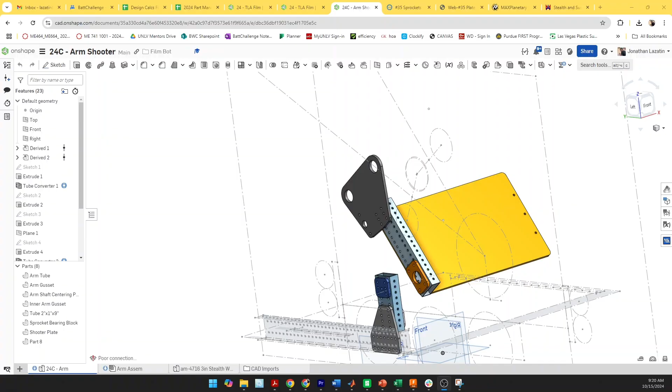So now we're gonna go through the process of setting things up in Fusion 360 to CAM the part. So CAM is computer aided manufacturing. This is how we develop the tool paths needed for the part to be cut out on the CNC router.

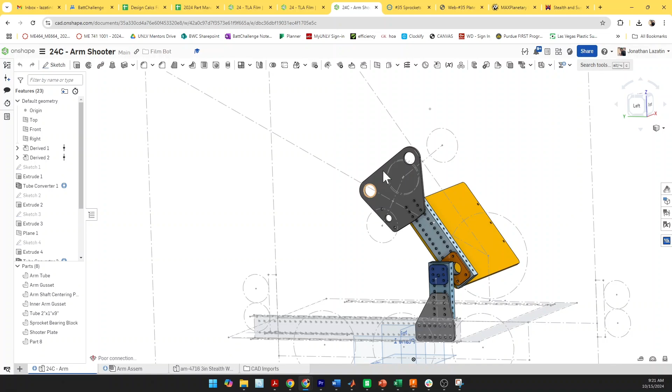So the first thing I'm gonna do in the part management system, let's go ahead and do this from the top where we put things into the part management system. So let's go ahead and do the shooter plate. This is going to be the first item in C. Let's change C to arm shooter, and then D is actually going to be intake. So changing our part management system based on how we're designing right now.

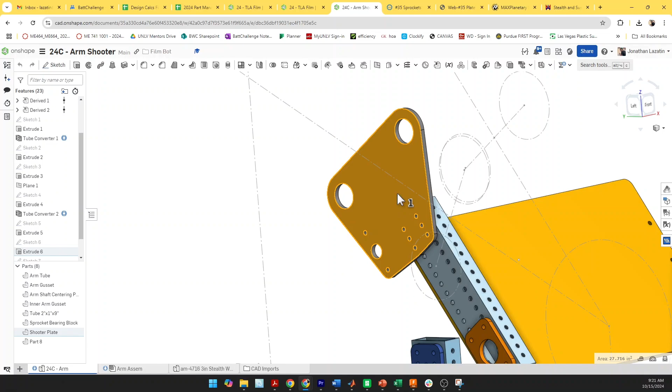Arm shooter, first part number, Control Shift V there. Go back to my arm. We're gonna make this a 1/4 inch. Let's do this in polycarb, a 1/4 inch polycarbonate plate. So we're gonna need 2 of those. Remember, they're flipped. One has the motor on the top side, one has the motor on the bottom side.

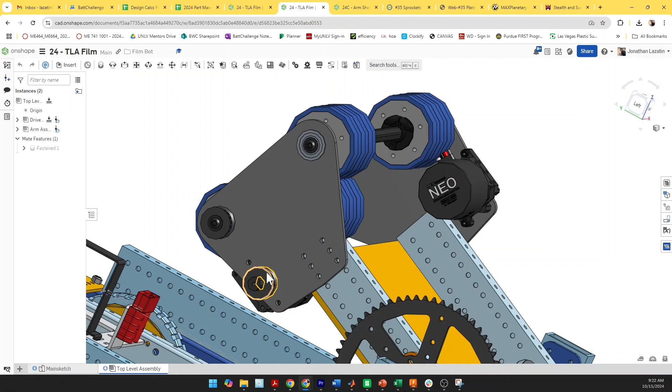I did this so that we could have one plate that could do both sides, but not necessarily wasting material to where we have like a second mounting hole on the other side of the shooter plate. That's another way to do it, but we decided to do just one side now and just flip it on the other side, which is fine.

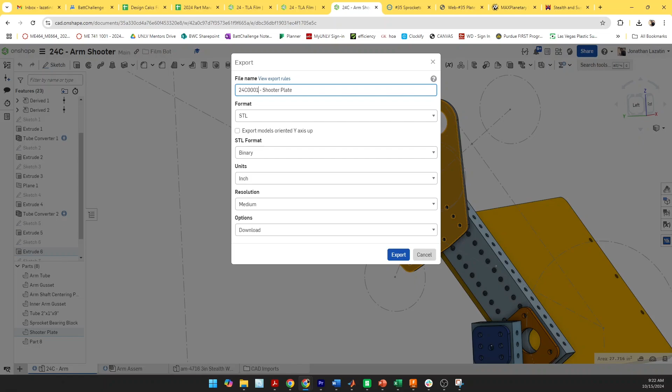So then let's see, what else do I need to do on the part management system? This is shooter plate, not obsolete. It is going to need a DWG. It's going to have the same part number for the file name, and this is a 1/4 polycarb. We need 2 of them, and they're going to be on the CNC router. Okay, and then from here, I'm going to need to export this as a DWG. This is going to be shooter plate, bringing in the part number.

Okay, so in export, what do we want, a DWG? I did the wrong thing here. There's 2 types of export options. There's export and there's export DXF DWG. We want this one right here. That's going to allow us to get that 2D shape of the front face. Same thing, name, DWG, download, good to go.

Now I'm going to go to my Google Drive. Now let's go to the UNLV Mentor Shared Drive, Fall Course, Robot Design, Film Material. And then that file that we just exported is going to go into the part files section. That way, if I design it, but somebody else is on the fabrication sub team, they could download it from Google Drive to do the fabrication. So if I'm on the design team, I'm just exporting all these files, and then the fabrication team is downloading them and using them to do whatever process they need to do afterwards.

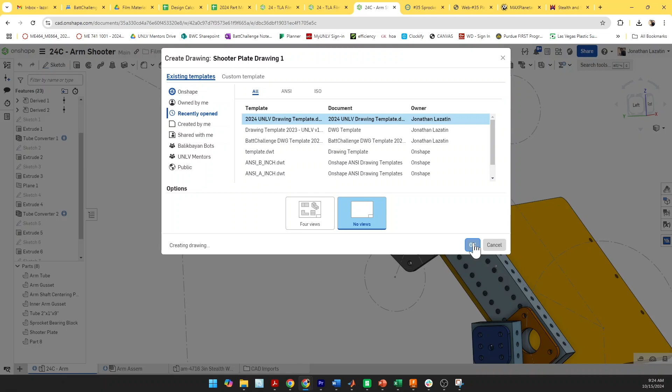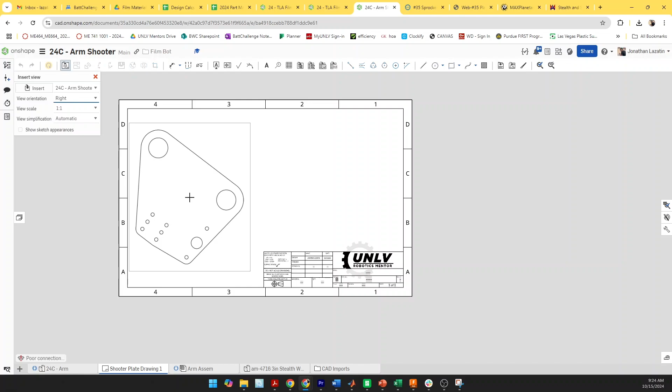We also need a drawing for this part. So right-click the same part, create a drawing of the shooter plate. Use the 24 UNLV drawing template. Let's see if this is small enough to fit 1:1 on a page. I don't think it is. So let's see what it looks like when it's 1:1, and let's do the right face. Oh, it might be. All right. So boom. Cool. So it is small enough to fit on one page.

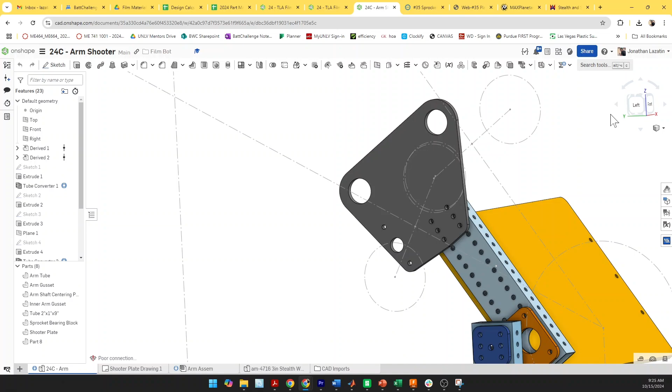Let me show you something real quick that also helped. This thing was designed at an odd angle, so it's bringing in the view from that angle. So if I go to that arm part studio, it is giving me the view directly from the side view of that part studio. So if I go on the right side, it's giving me the part at this angle. If I take this front face and I press N for normal, I'll look straight down the side of the plate, kind of like if I was looking straight down the shooter subsystem, right?

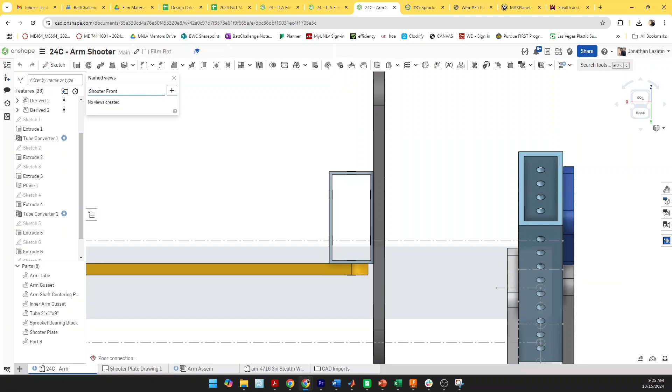If I click this cube and then I go to named views, I'm going to call it shooter front, and I'm going to add this view. Okay. Now if I go to my drawing again, I can double click this guy. It'll open up a menu over here, and in my view orientation, I think I need to drop in a new one. So let me go ahead and remove these guys.

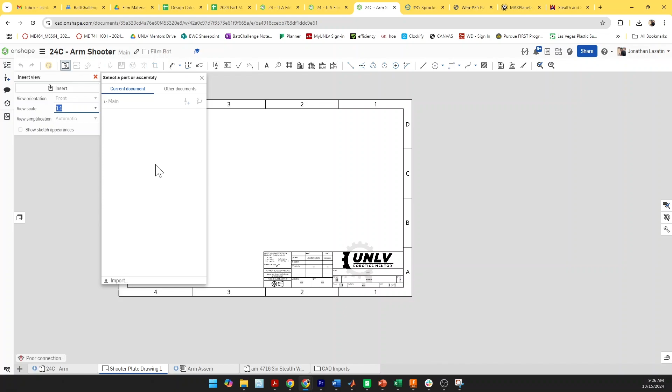Insert view. I want to insert my shooter plate. Current document, shooter plate, 1:1, and then my view orientation, now it's uploaded shooter front. And that should give me a little bit smaller of a projection of that view.

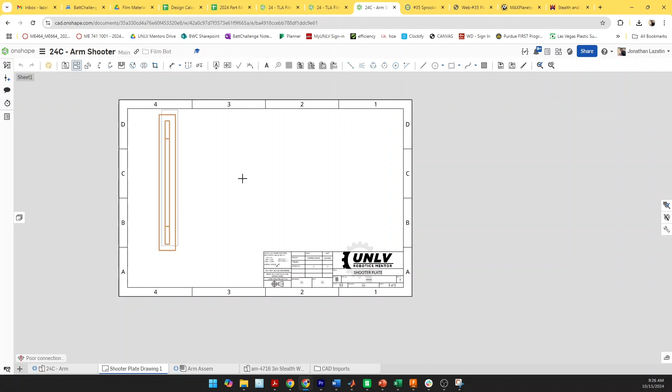There we go. So now it fits better on the paper. So what would the fabrication team want to know? Well, they'd want to know how big of a piece they need. So I'm going to do top and bottom. Boom. I'm going to do thickness so they know what material to grab.

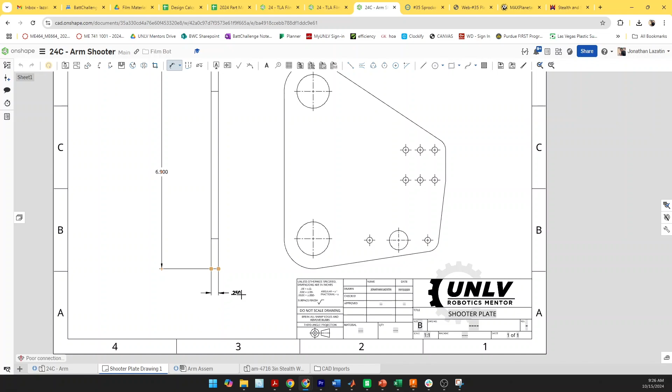And then I'm going to press M, which is a dimension tool in drawings that's maximum or minimum. So I'm going to go from the front. Actually, no, the maximum is at some straight lines here. Usually if there's a curved feature like this and you want to dimension the highest points here, you'd use maximum and minimum. But since the front and back face have these straight lines, I should be okay just to use the regular dimension tool.

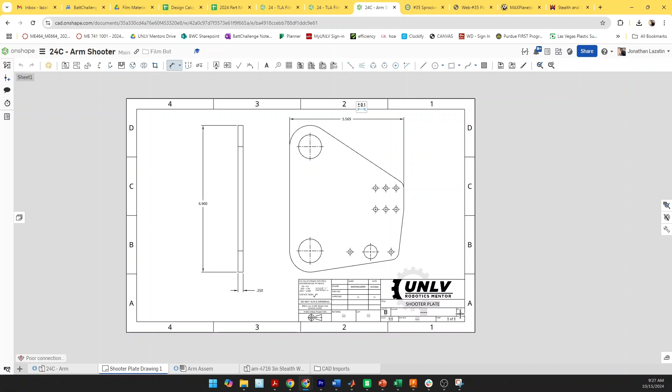Okay, so we need to have a part that at least has an area that's like 7 by 6 inches of cutting surface, and then a 1/4 inch polycarb plate. The thing that I forgot to do was to do the properties. You see how this is now empty? That's okay. I can go here, shooter plate, go to my properties.

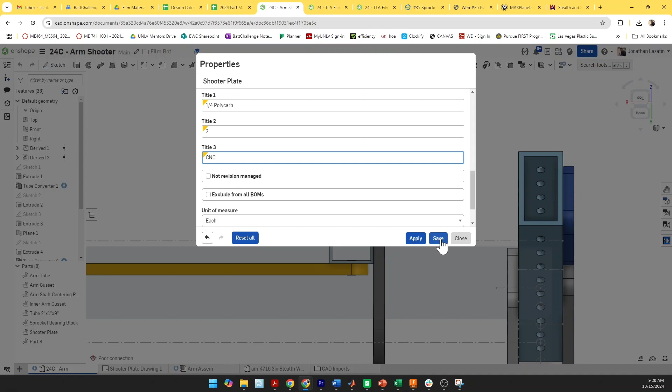I can open up my part management system, grab part number, and I'm looking for arm part number. This is revision 1. Title 1 is material, so that's 1/4 polycarb. 2 is quantity, so that's 2, and then 3 is process, so that's CNC. I go ahead and save that. I go back to my drawing, and now it shows.

Now that circle in the upper left is yellow, meaning that there's something to update. So I click that, and now if you watch the part data down here, it fills in V1, CNC process, 1/4 inch polycarb, 2. So now this is ready to go for the fab team, so they know they have to make 2 of these.

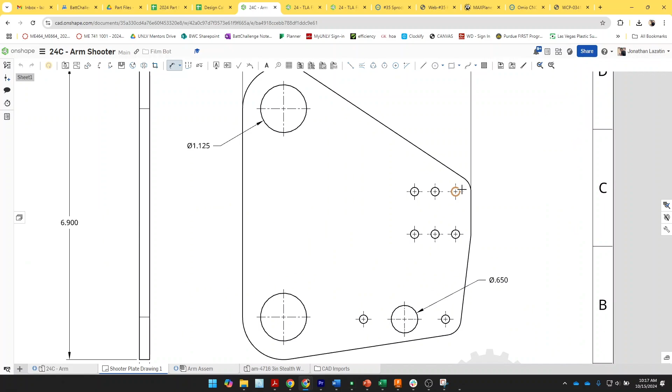I forgot to mention this previously, so I'm going to splice it in here. Other things that the fabrication team might want to know are things like this hole size. They can confirm that's a bearing hole size by looking at that. This hole size, so that'd be a shaft pass through, and then these hole sizes here, just to confirm that we're using the 201, which would be the 5mm drill bit that we would use to do those.

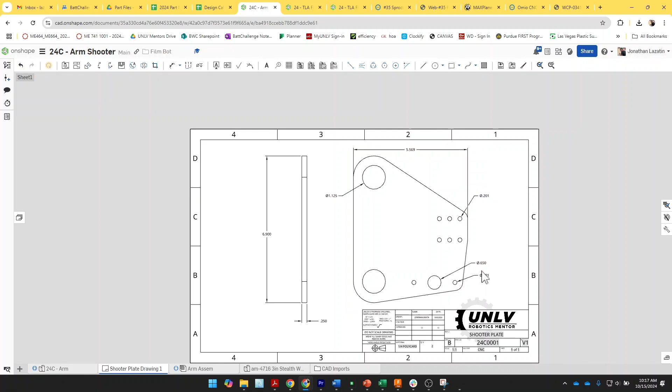So it'd be important to do the interior dimensions in here as well, just so the fab team knows what tools they need to grab. And typically the 5mm drill bit, or the milling bit, is what we use for all of this, but for them to confirm, they can look at this information here.

Right click, export. We are going to want the part number, and then part number dash part name. It's currently being exported. This is going to be in PDF drawings. Once this is downloaded, it's going to drop down in here.

Now, the last thing I need to do to finish up this part management section is to link the files here. So that's going to go shooter, share, copy. This is the PDF drawing, insert link, paste it in there. Part file, DWG. This is the shooter plate, share, copy link, and then paste it in here.

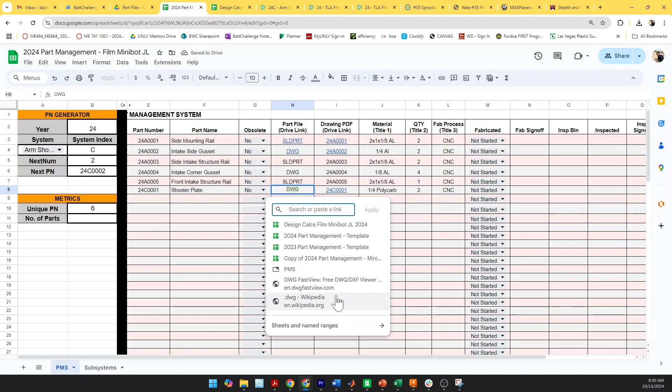Boom. Cool. So now I have all of the stuff that the fabrication team needs to do this. So as a design team member, I did my job of putting in all the information for the fab team. Now from the fab team, I would go in and download these files. I'd look at the drawing, see how many I need. I'd look at the part, see the area of polycarb that I need to make this. I would download the DWG.

Once I download the DWG, I would open up Fusion. All right. So now that I have my Fusion open, I'm going to upload, select files, and then I'm going to go to the shooter plate DWG that I just created, and then I'm going to upload that. And then once that's uploaded, you'll see it populate here on the top left.

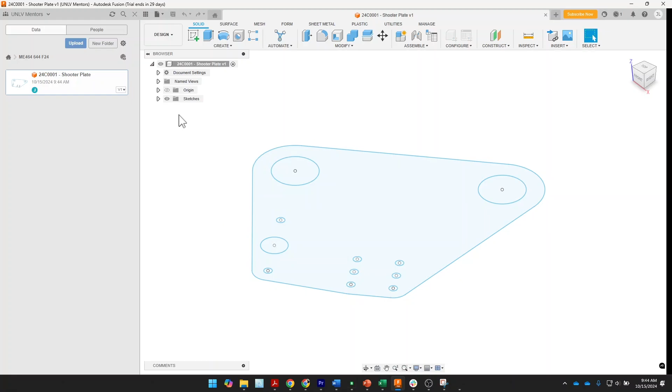All right, so now the file is uploaded. I can open it up on Fusion. It'll load like this. It's just the 2D shape, and then from here, I'm going to move from the Design tab to the Manufacture tab. So the first thing when I'm in the Manufacture tab, I'm going to set up my workspace. So I'm going to go and create a new setup.

I'm going to first change the stock to be a fixed size box, and I'm going to change the height to 0.25 inches. I'm using a 1/4 inch piece of polycarb. Here you actually take calipers and measure, so it's typically a little bit less than 0.25. Usually it's like 0.235 something. But that would be the measurement that you get from the calipers from actually measuring the stock you're using.

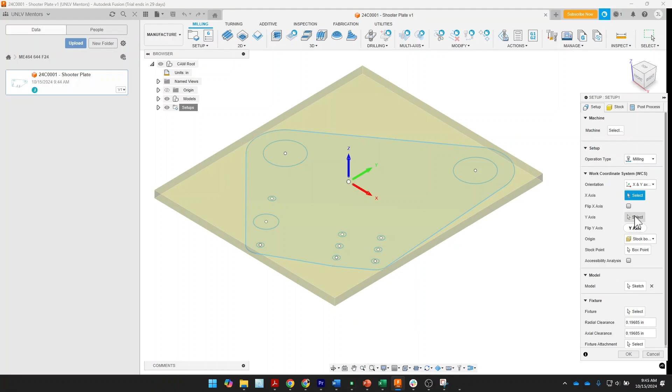Next, in the setup section, let's change the coordinate system so that it's a little bit friendlier. I want the x-axis to be along the face of the part, kind of similar to what we do with the drawing. I'm going to select my x and y axes. My x-axis, I want to be this guy here. We know this line is perpendicular to the shooter mounting tube, so I'm going to choose that as my x-axis. And as you can see, it very heavily reduces the amount of material needed to cut this part.

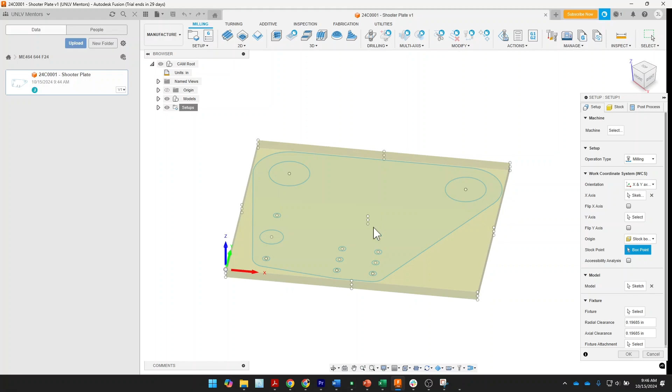And so here, I'm going to also change the stock point to be the bottom left corner, because that's going to allow me, when I zero it on the machine, to do a quick XY sweep to make sure that the stock I'm using actually fits the part I'm trying to make. So that's good. I've changed my thickness. I've changed my coordinate system to reduce area of the part on the material, and then I've changed my box coordinate to be bottom left, and also the top surface is what you want here. You want the bottom left corner top surface of your material.

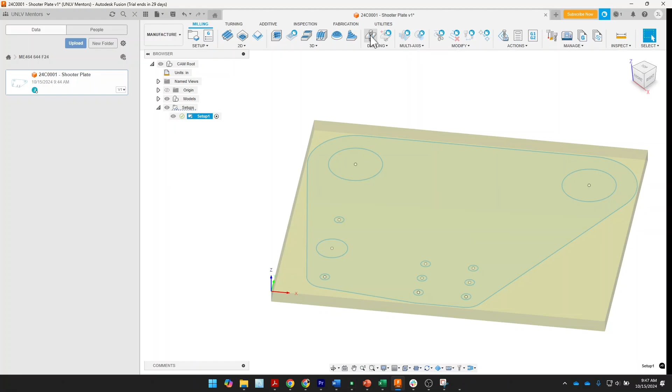So my setup's done. Next, I'm going to start cutting out these internal features. General workflow is internal features first, external contours last. Holes, just straight drill holes, which are all the 201 holes, do first. And then second is going to be the large holes. And then final sweep is going to be the exterior. So first thing I'm going to do a drilling operation, select my tool.

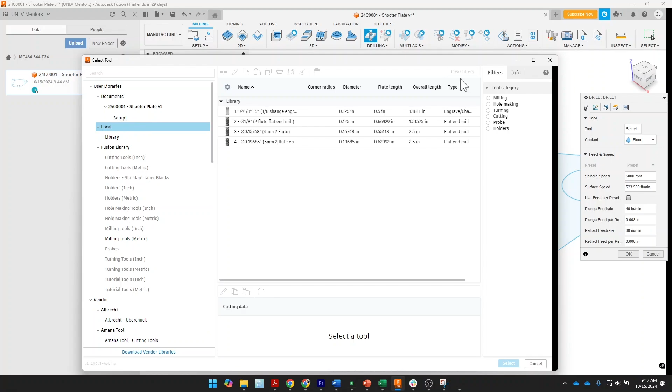The tool that I have is a 5mm single flute bit, which I think is in the shop computer, so it's not here. So I'm actually going to add this tool. Going to library, add tool. It's a flat end mill, and then it says 5mm single flute. Vendor is going to be WCP. Cutter, it's going to be flat end mill, millimeters. It's carbide. 1 flute. Diameter is 5mm.

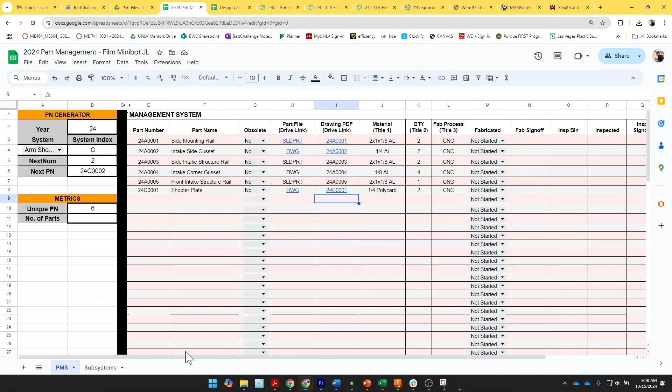I'm going to put in some numbers in here just because the actual numbers are in the shop and I'm doing this at home. But essentially this is already created. So let's get this all sorted out first. I'm just going to put in some numbers that are relatively okay. Overall length must be greater than length below holder. So let's say that there is 15 below the holder. Shoulder length is 13. Cutter is 12. Okay. Cool.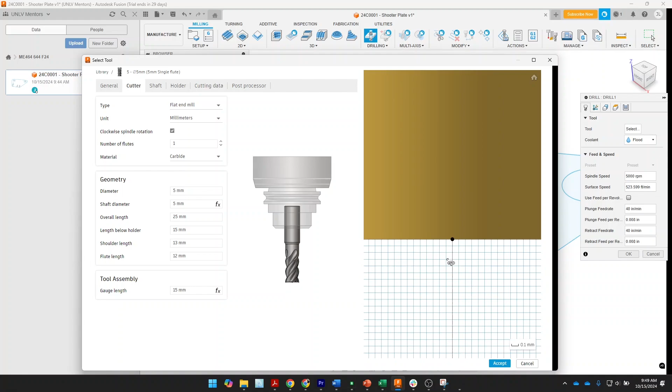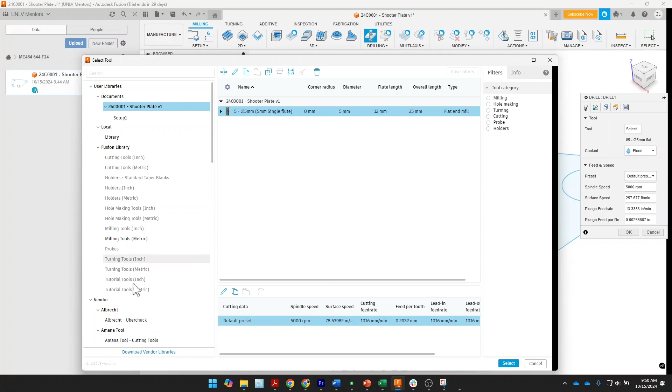So this is my part. Single flute, carbide, flat end mill, 5 millimeters in diameter, 12 millimeter cut length, and the rest are kind of guessed based on having seen the bit, but you'll have the real numbers in shop. So I'm going to do this 5 millimeter single flute as my cutting tool. Oh, all the presets for that tool are also included in there as well. So let me edit those. The single flute, I'm going to go into edit that part. So library, 5 millimeter single flute. Let's go ahead and edit the data.

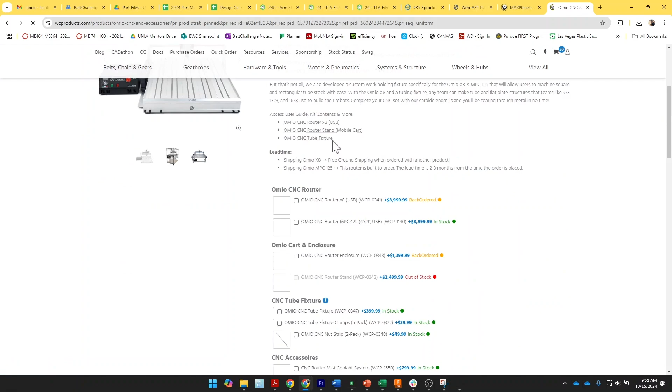And let's confirm that real quick. So back, we're going to go to the Omio. They have a manual on the website. And so if we're looking, here we go. So, okay, so it's actually 24000, so I'm going to change that. Feed: something between 60 and 120 is typically good for aluminum. These numbers can be doubled or tripled for softer material like polycarb, like the one we're doing.

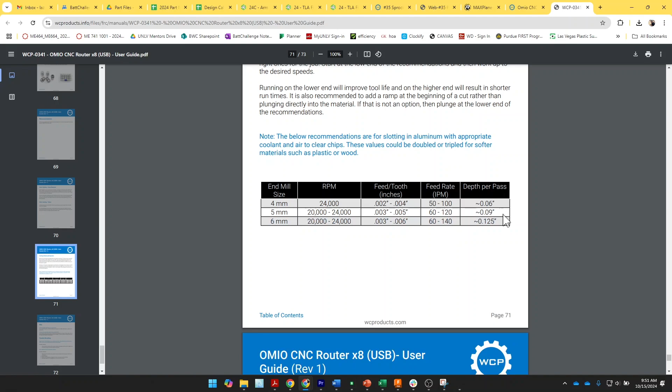And then depth of pass. Okay, cool. So, all right, so I like my numbers. This is going to change to 24000. And then 100 inch per minute here is fine. And then I think we're good here. So now when I look at my tool path information here, my drilling path, my RPM is changed, my speed is changed.

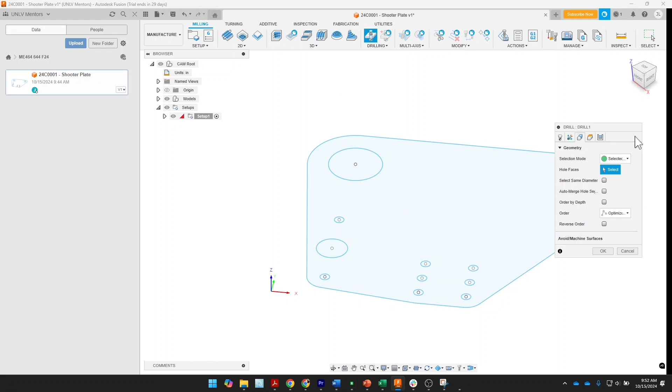Next, I'm going to select the geometry that I want to drill out, and I'm going to select the points. So this is going to allow me to just select the centers of each of these holes. And these are all the holes that are that 0.201 diameter that we did in the design. For the drill depth, I'm going to do this bottom height. I'm going to change this to lowest selected, stock bottom, and then I'm going to make an offset of 0.0125.

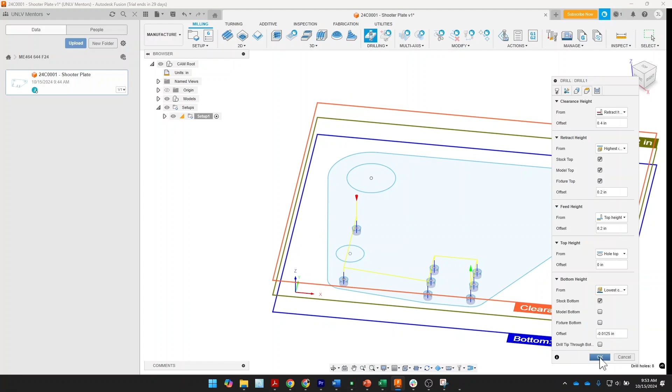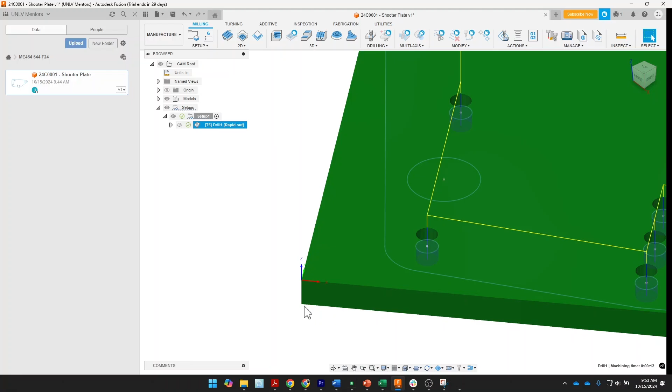And so what this is going to do is it's going to tell the drill bit to go from the top of this origin here. It's going to go the depth of the stock, until the stock bottom, and then it's going to go a little bit past it by 0.0125, and this is going to allow us to go through the part barely into the spoil board underneath, but it'll make it so that we definitely go past the part if we've zeroed on top of the surface correctly. So that's drilling the holes.

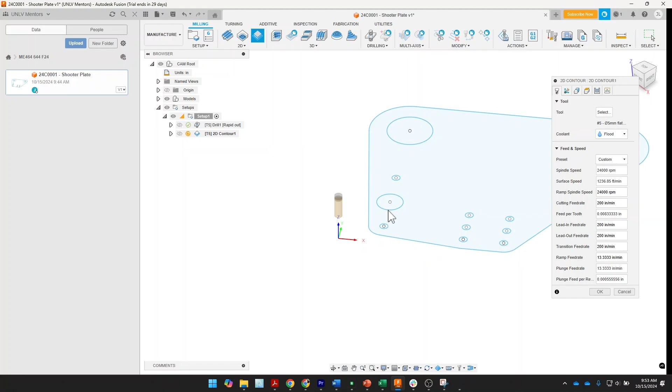Next operation, we're going to do a 2D contour, and then we're going to select the same tool, 5 millimeter single flute. Okie dokie. And then we're going to change the cutting feed rate to 200 because this is polycarb. It's much softer than aluminum, so we can go a bit faster. I'm going to do all of the geometry, all of the larger holes now.

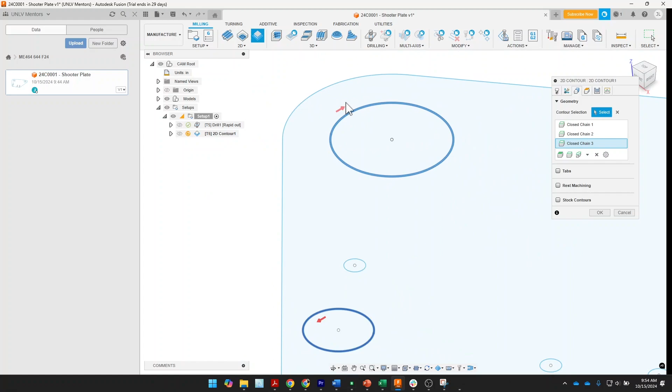Now, when you do 2D contour, something that you have to consider is the location of these red arrows. That'll tell you what side of the geometry the drill bit will be in. So this tells me that the drill bit will be doing its path inside of the circle, which is what we want. We don't want it to be on the outside of the circle like this, because then we'll be cutting out this additional material on the outside. So interior contours, red arrows are inside the part.

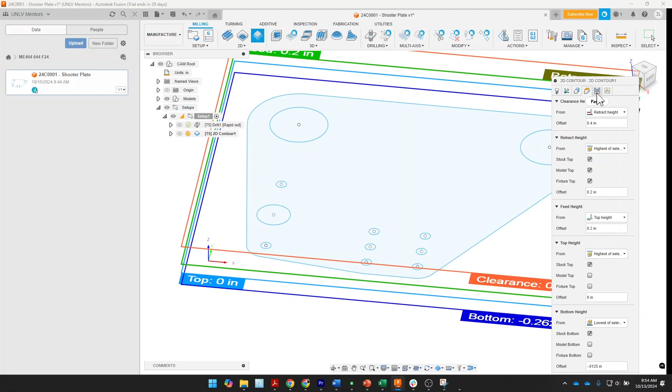Heights are going to be the exact same thing. I'm going to go to bottom height, lowest point selected, stock bottom, -0.0125. And then for these 2D contours, because the drill bit is going to be moving as it's cutting, we also have to tell it the depth of the cut. So I'm going to go to this multiple depth section here. I'm going to change this to 0.1. For polycarb, 0.1 is what I typically use.

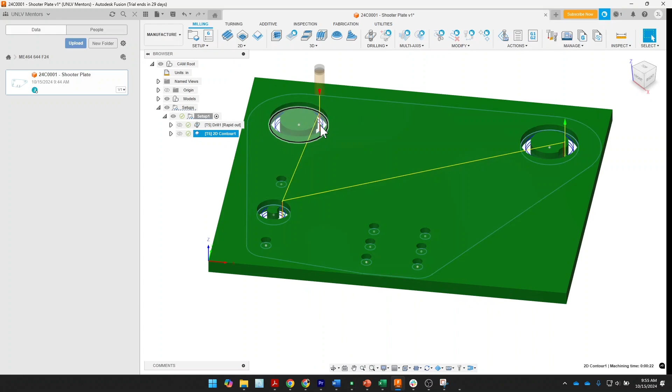If I'm doing aluminum, I would pick something like 0.05 or 0.04 or 0.06 if it's a really small part and it's not going to get too hot. But 0.1 for polycarb works fine here. And then I will select OK. And now it should create my tool paths. You'll see that these blue circles indicate the path that the drill bit's going to go on.

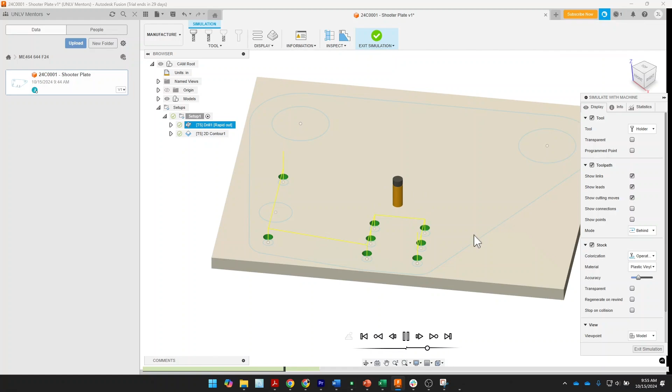So I can actually simulate what it's going to look like if I select both of these tool paths. I press Control to select both of them. I have the simulate with machine button here. I'm going to play that. And this is the speed slider, so you could change the speed based on how fast you want to view the simulation. But you can see the drill bit actually moving in each of these contours that it's making. So those will be the interior passes.

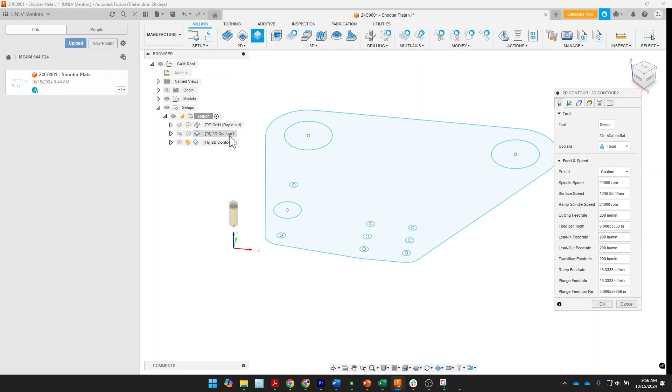That looks fine. And then I'm going to do one final 2D contour, and this is going to be on the outside. Because I did a contour before with the right tool settings, it'll pull in the tool settings from the previous contour, which is fine. It has the 200 inch per minute feed there, which is good.

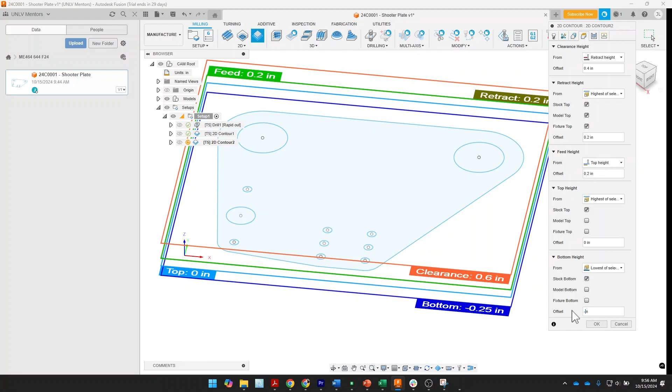Geometry, I'm going to do exterior contour. Here I do want the drill bit to go on the exterior contour because this is cutting out the part. We want everything inside of this shape to be kept, and so the drill bit is going around the outside of this part. Next, heights, same thing: bottom height, lowest selected, stock bottom, change this to -0.0125. Passes, multiple depths, change this to 0.1 because it's polycarb and it's soft, and then OK.

Cool. So now I can see actually the whole tool path. I'm going to simulate, and then it's going to drill all the holes. It's going to do the contours. So one thing to note, because it's 1/4 inch thick here and we're doing 0.1 inch drill depths, it's going to do about 3 passes to get through the entire material. So it's going to go down 0.1, drill out, 0.1 again, drill out. So that's 0.2 now. And then it's going to go the final 0.05 plus the -0.0125 to get down to the rest of the material.

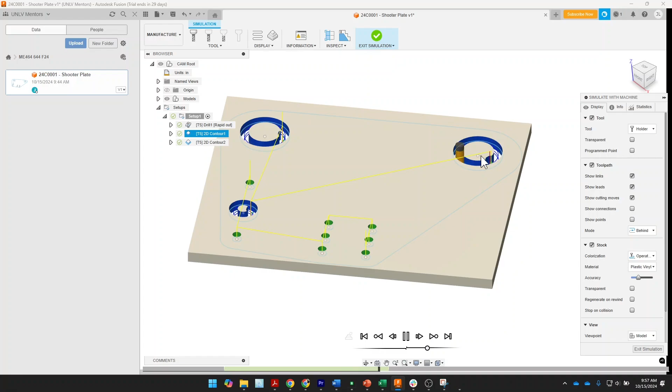So one of the things I'm looking at when I'm watching the simulation is that it's doing the amount of tool paths that I expect it to based on the selection for drill depth. So I'm also confirming here that it's drilling on the outside contour, and it did 3 passes, so that looks good. And now I'm going to export this in two

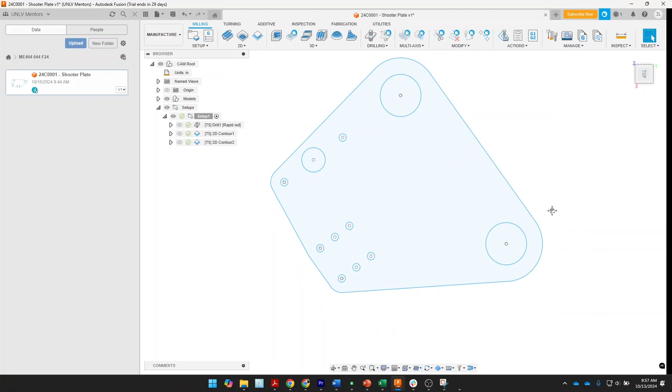different files. So first, I'm going to take both of the inside contours, and then I am going to post-process. It's going to open up this new window. Mach3 is the post-processor that we use for the Omio. So make sure you select Mach3 here. File name, I just put the part name, and then I put whether it's the interior holes or the exterior contours, because those are going to happen in 2 different tool paths.

So this is shooter plate holes, and then let's put this in a different folder. So I'm going to go desktop. I'm going to create a new folder called CNC files. Already contains, oh, I already have one. So let's go ahead and rename it. Fall 24 CNC files. Cool. So select this folder, and then this now should download directly to that folder.

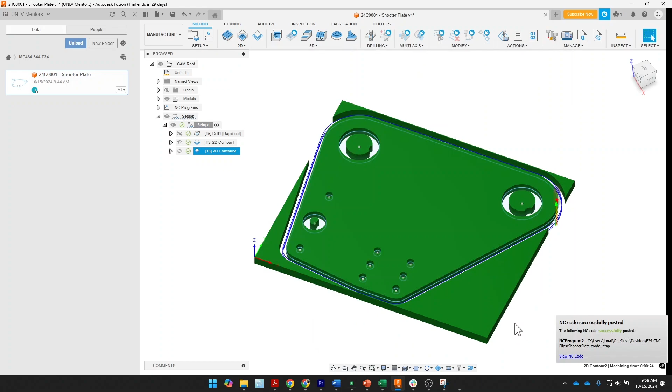Going to do the same thing with this exterior contour toolpath. So I'm selecting the toolpaths that are being exported. Same thing, post-process Mach3. Now this is shooter plate contour, going to the same Fall 24 CNC files. And then I'm going to go to that folder, Fall 24 CNC files.

And then the next couple things I'm going to do before I actually put it on the Omio is I'm going to remove a couple of lines from the G code, because these lines are making the drill bit go into the material before actually cutting, which I want to prevent. There is probably a better way to do this by selecting some options, but this is what I have working so far. I'm going to open up the shooter plate G code. Let me close these other files. I'm going to delete at the top of my file.

I'm going to look for the thing that says G28 G91 Z0. I'm going to remove this. I think this is supposed to move it to 0 in the machine coordinate system, but for some reason this is making it go to the top of the part, which I'm going to remove. And then I'm going to remove this G28 G91 Z0 all the way to this X0 Y0 here. I'm going to remove all three of these. Control S, save, and then close.

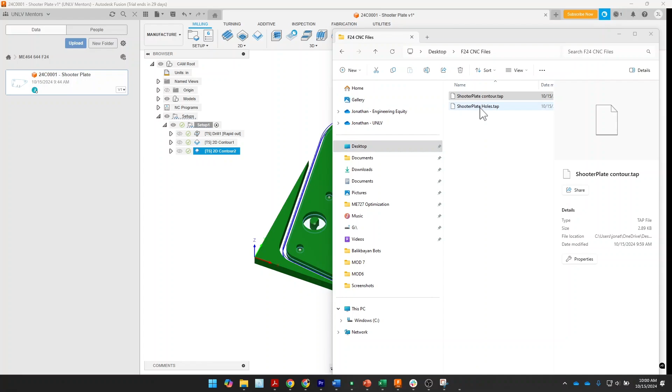And then same thing with this shooter plate holes. Open in Notepad. This G28 G91 Z0, delete that. Then G28 G91 Z0 all the way to G28 G91 X0 Y0, delete that. Save, close, and now these files are ready to open in Mach3 on the CNC router computer for cutting.